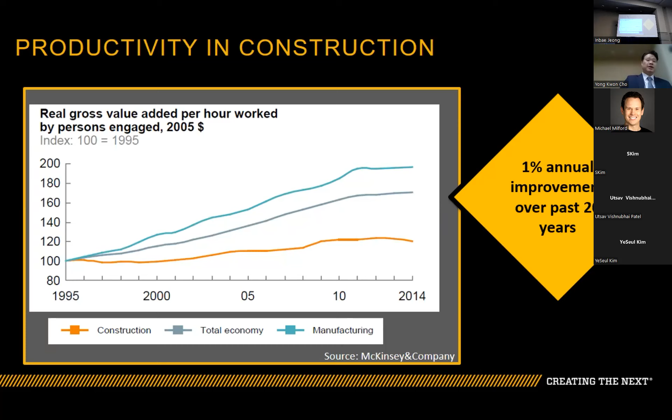Although the construction sector has a big impact on the world economy, productivity-wise it is stagnating. Compared to other industries, you can see the orange line—there is only 1% annual improvement in productivity over the past 20 years. So we know we have a problem of productivity.

Construction itself accounts for 20% of overall workplace deaths. In 2019 there were over 5,500 people who died in construction—about 20% of total workplace deaths in the US.

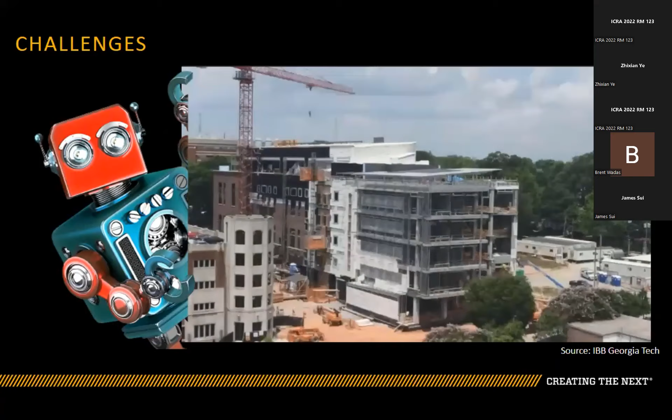This number indicates what happens every day. What other challenges are there? We know there's a strong need for automating many construction tasks because of safety and productivity issues. However, construction sites are unstructured and keep changing—not only the main structure, but temporary structures, construction equipment, people, and machines moving around every hour, every minute.

So this is a challenge we can apply robotics and automation to in the construction area. This is our lab actually doing this task at a construction site.

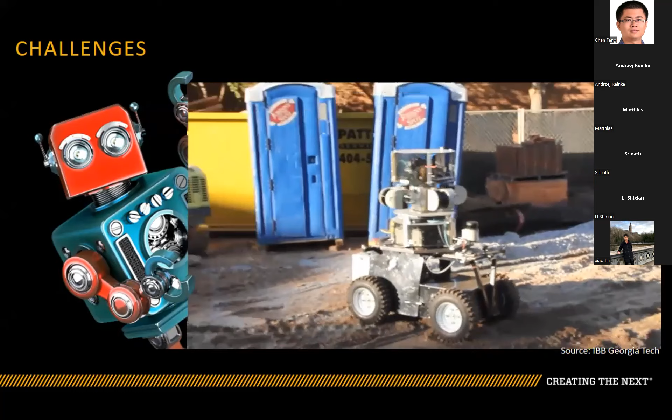You can see the soil condition—this is a very typical construction site. You can see the wheels spinning, the deep penetration of the tire. It's a challenging environment, but it's very typical of a construction site.

Also, those material or dirt piles—you can see the black dirt pile—they move around every 30 minutes. So an hour ago the site is no longer the same site. It's not just daily changing; the construction site is different every day, but every hour is different. So it's very challenging for a construction robot to adapt to this ever-changing working environment.

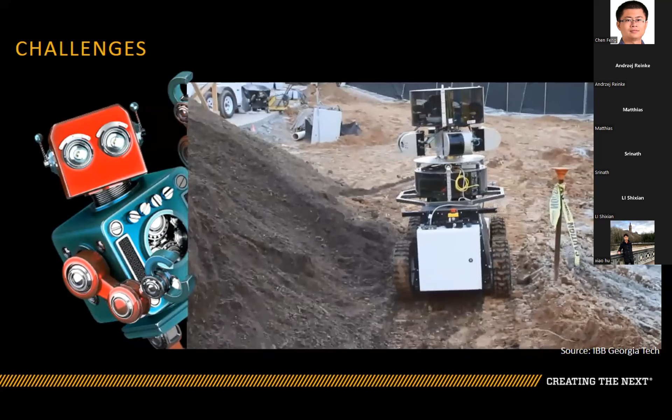And make an efficient function out of it. It's a very challenging work environment compared to any other industry.

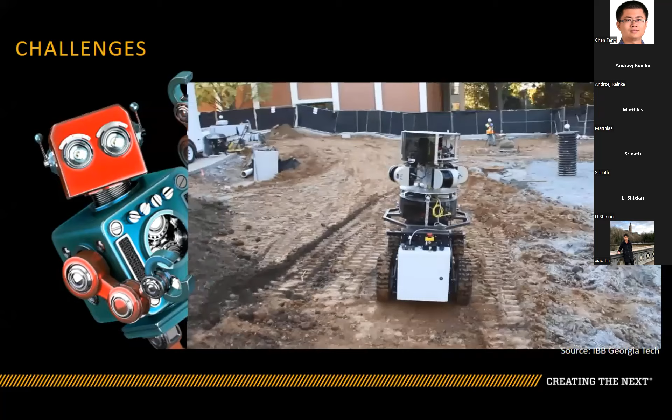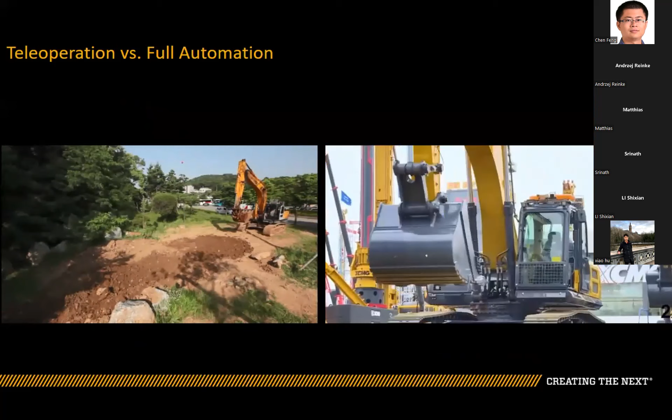Then we have a situation: in such a typical complex work environment, which method would be better—teleoperation or semi-automation versus full automation? On the left-hand side, in both cases, the operator is not in the cabin.

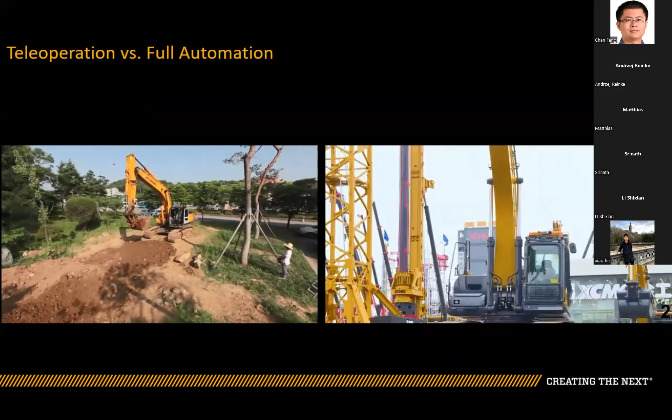You can see the gentleman standing next to it there—he's teleoperating the excavator. This can also be done at home, through the network, so he can operate this machine from his office as well. That is more of a teleoperated or semi-automated function.

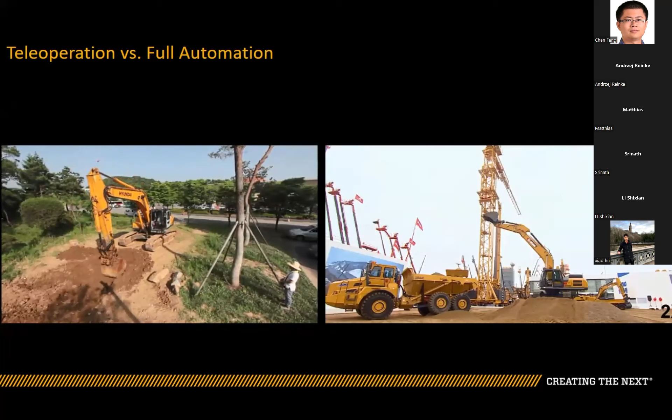Versus the right-hand side, which is full automation. So what approach would be more feasible in construction? Both technologies are very advanced, but we need to think about the real-world situation. This is an open question, and we have a good debate section later on a similar topic where we can discuss which method might be better.

Let me give you another data point: by 2057, robots could replace or displace 2.7 million jobs in construction. So is that good or bad? Is there resistance from construction workers because of fear of losing jobs? Or can we think of this as a good opportunity for the future workforce to get new skill sets to prepare for future technologies? This is also an open question.

We don't know the answer yet, so today's workshop may be a good opportunity to discuss this kind of situation, and I think we can prepare the future workforce. Okay, so that was my short opening remark.